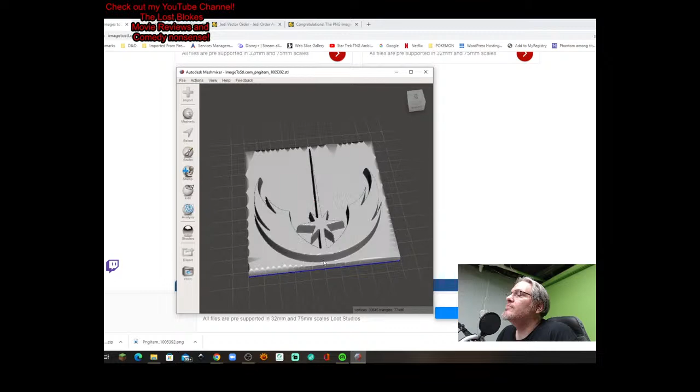Now, I had mentioned that has kind of a weird drop off there and some weird things going on. So I think what I'm going to do is actually reconvert, and I'm going to make it deeper. Alright, we'll go there.

We left the invert input off on that one. I'm not going to compress the result. X-axis or Z-axis mirror, what that actually does is something kind of interesting. It takes the plane, the base, and puts the same exact image on the back. So it would have this back here as well, which isn't going to help me any, but just so you know what it does.

Alright, we'll change it, we'll go with a depth of 12 and a base of 6. Now there's a reason 12 would be too high, and I think that it would cause crushing issues with the stamp itself when we went into the press.

So I'm going to leave that off, or I'll show you what I'm going to do. Okay, so we're going to convert it. Alright, we've got it, we'll download it.

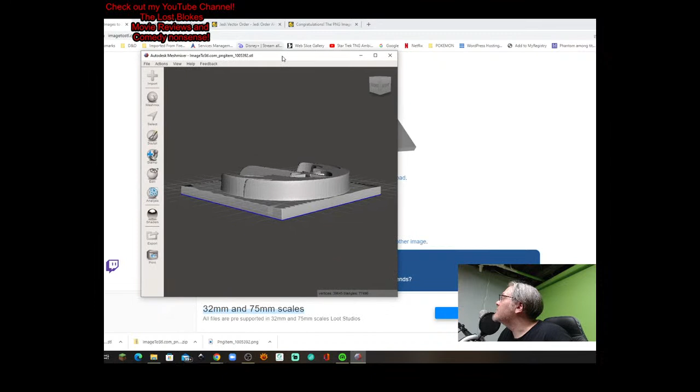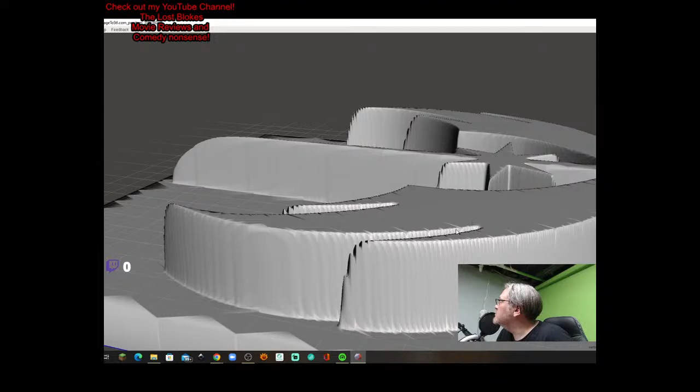Okay, so now we have the same thing, but it is a deeper object. You see how that is, and so we see the tapering, and then we also see this odd stippling here, and we don't want that, because that will cause issues.

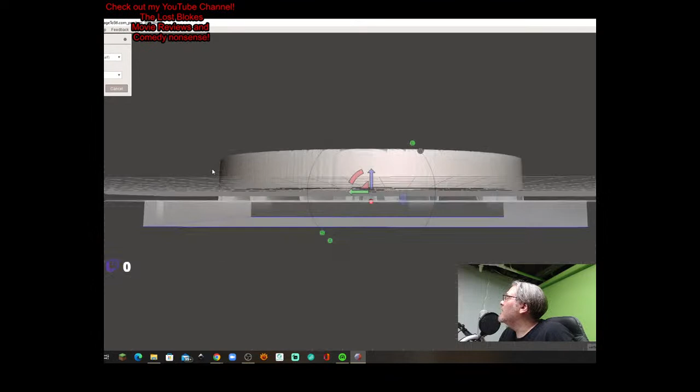So what we're going to do is come up to Edit, go to Plane Cut, and it's going to bring up the plane cutter. Now, real important here, you see, here's the plane that we're cutting. See that? Now it's cutting—if you look at this arrow right here, it's going to cut everything below the plane. So we don't want that, we want to cut above the plane.

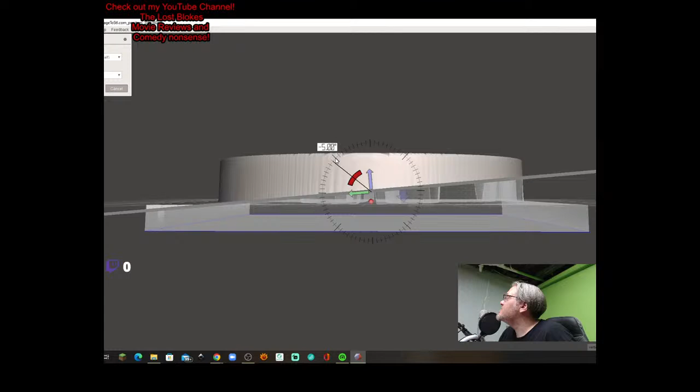So I'm going to grab here onto this red curve, which is going to allow me to change the angle of the plane. We're going to go out to here where you see these tick marks, and drag it along these tick marks until we get to 180. The reason we're dragging on the tick marks is because that makes it exact by 5 degrees. Alright, we're getting some CPU crunchage here. Come on, there, 180, we'll release it there.

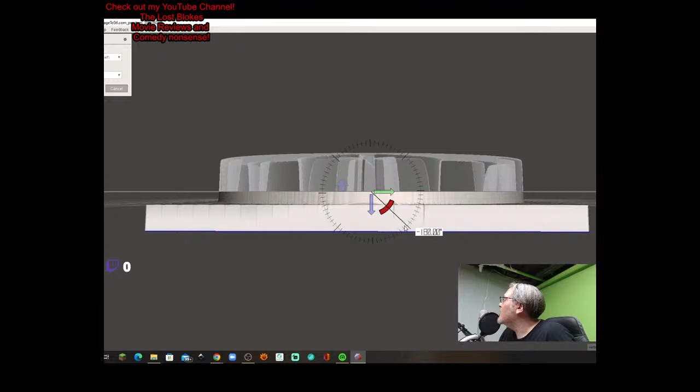Hopefully it's... nope, dang it. Alright, did I just go the wrong... nope, there we go, alright. There we go, we have a plane.

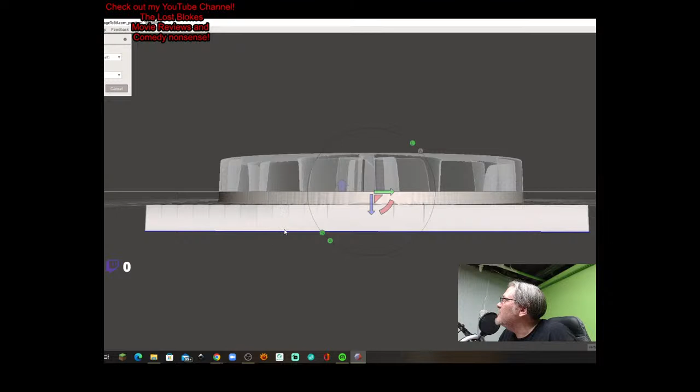Alright, so remember, we want to go 6 millimeters approximately, because I found that's a good height. So here we have 6 millimeters from the top of the plane to the bottom of the base. We're going to grab onto this purplish blue arrow, which is the up-down. So we're not free-forming here, we're just literally moving that plane, and we're going to bring that up to 6.

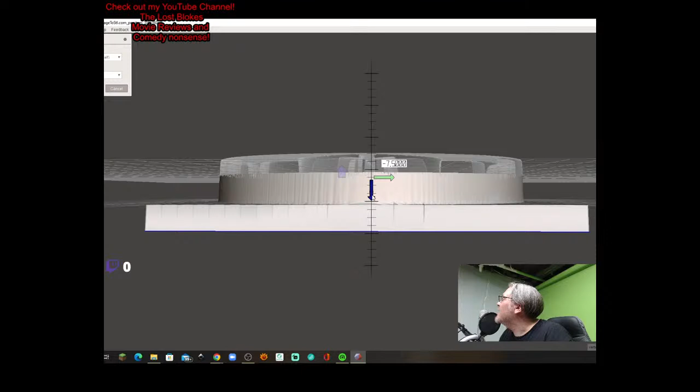Okay, well, you know, if it makes me do 7.5, I'm okay with that. So here, now it shows what we're cutting and what's going to be left. There were some odd striations and things coming from the edges as well, so this will help to take care of that too. So now we are pretty happy with what we've got.

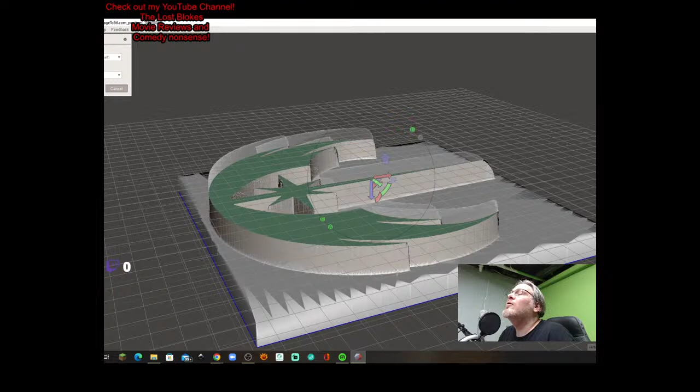We're going to cut up here. Oh, okay, wait, you can't see that, let me pull it down. Now it shows the plane cut settings here. The cut type is going to be cut and discard half, and we already know what we're discarding because that little arrow is pointing above, so we're discarding what's on top.

And then we're going to do a remeshed fill, because we want to remesh what we're cutting, because if this STL is hollow, we're not going to have a surface. So we want to remesh fill, and then we click accept.

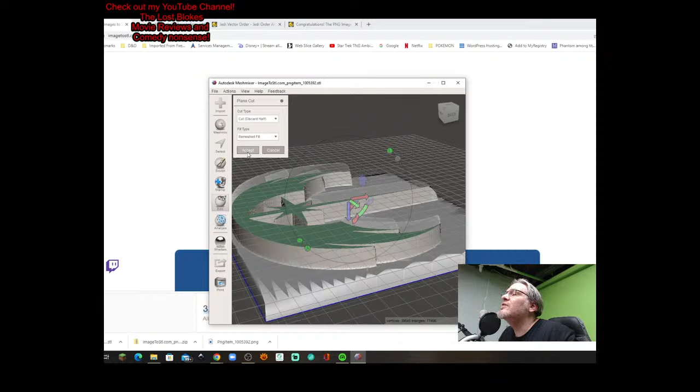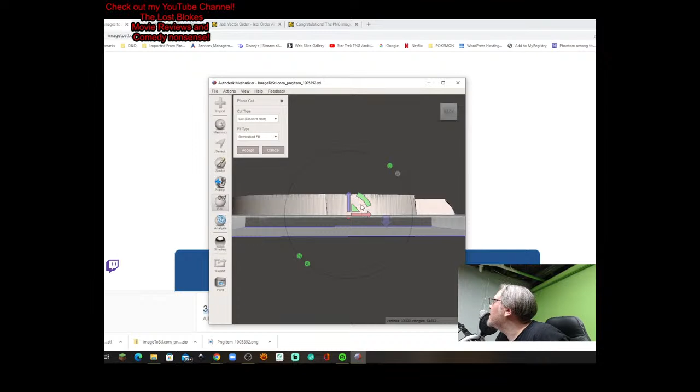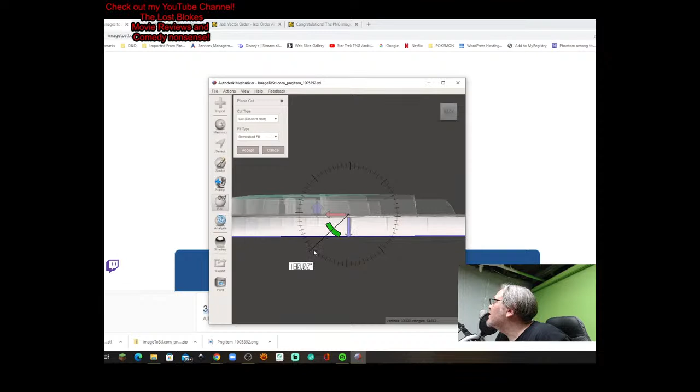All right, we're bringing it over to 65, 70, 75, 80. Come on. There, is that right? Don't you love it? Come on, CPU, you can do this.

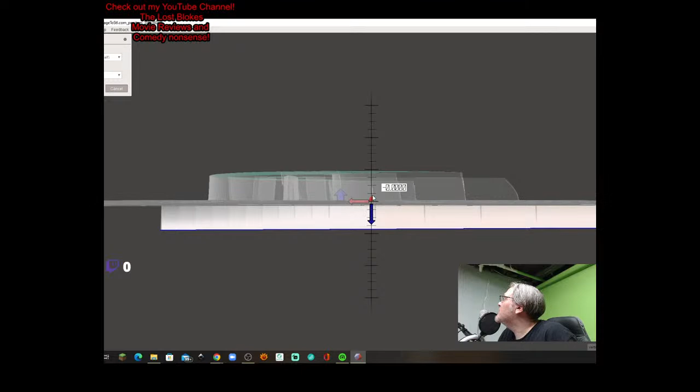Okay. All right, and again we're going to run this up to... all right, that's fine right there. Okay, again, that's what we're cutting off.

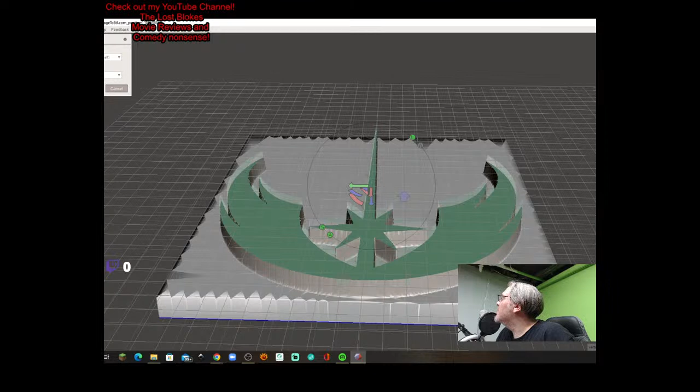We're going to cut and discard half, and accept. There we go. All right, so now we have a very clean surface. You see that? You don't have the striations running in from the edges, and there's only very minor steepling on those edges there. So this is going to be a really clean press.

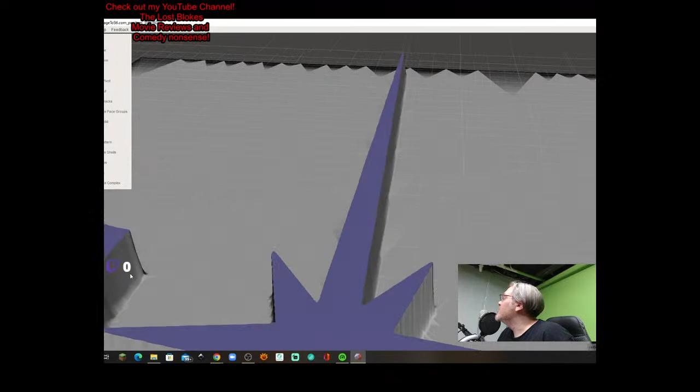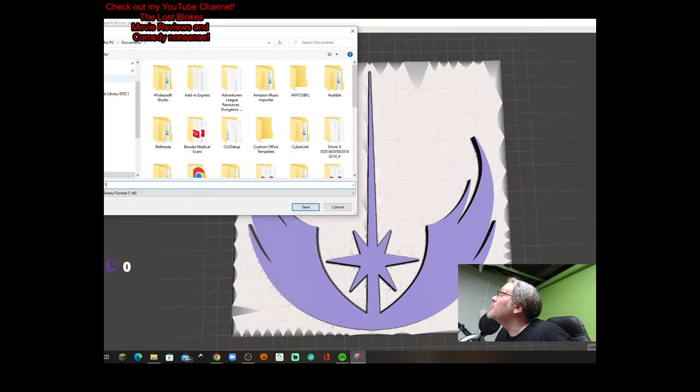Just like that. Okay, now we can save—or I'm sorry, no, with Meshmixer we want to export. So we're going to export it. Still going to be in STL. Now, why is that saying ASCII format? We're going to go to binary, and then we're going to type in Jedi 1, and we'll save that in 3D objects.

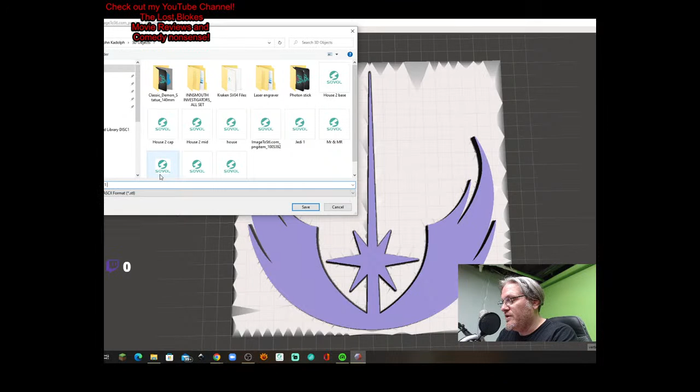All right, now I'm going to save it in ASCII as well. So we're going to export one more time, just in case. Jedi 1 ASCII. All right.

And we'll save it like that as well. Okay, all of this extra stuff around this base isn't going to matter, it's not going to affect whatsoever. So we're going to export it again, so we'll have two different files to look at. And we're going to use...

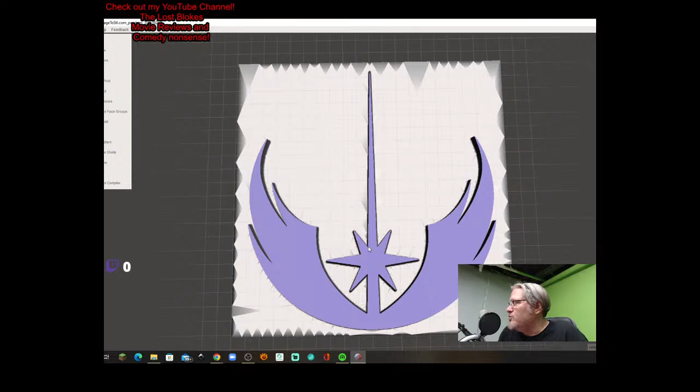CHITUBOX for our slicer. I have an Anycubic Photon Mono. I bought it when it was the 2K version, which is fine. I mean, it does just fine. Hopefully upgrading in a year or so to one of the Anycubic Photon M3s or the M3 Plus. If I can do the M Plus, I'm going to do the M Plus because then I can make much bigger prints. And then there's one step above that even that actually has an autofill for the resin, which is spectacular.

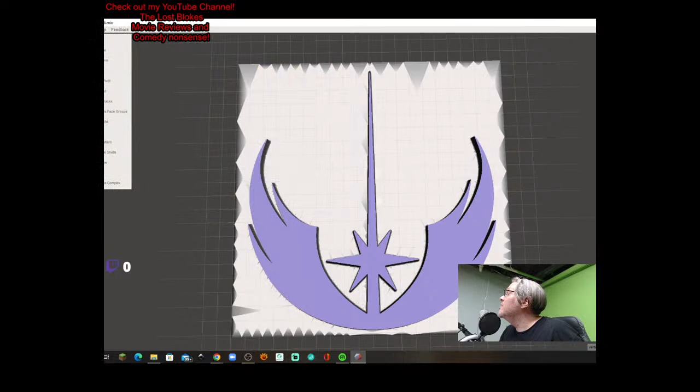But okay, we're done converting. So we're going to just close out Meshmixer here. You know what, I'm going to save the project as well. Okay, so now we're closed out there. And let me bring up CHITUBOX, and I'll bring that over.

Okay, here we have CHITUBOX, best slicer in my opinion for STLs, for resin. All right, what do we got? What do we got? Where is it? 3D objects. Here, Jedi 1. There it is.

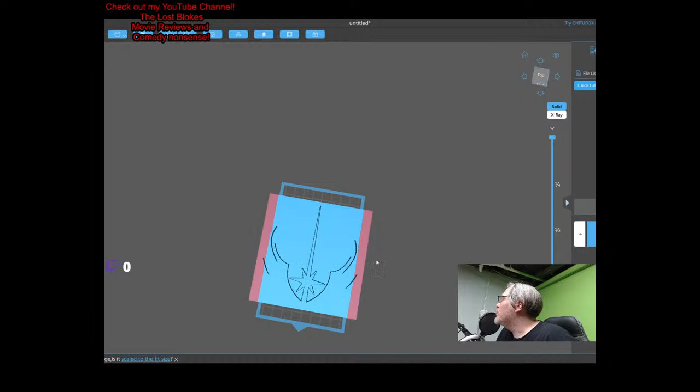Now, obviously it's too big for my build plate. No problem, but let's take a little look, because remember, I was worried about the steepling and all that. There's a little bit, but not enough where it's going to cause a problem.

Now, I'm not going to hollow this out because I want this to be as solid and as strong as possible. Instead, we're going to just go to scale to fit, and then we're going to bring it up just a little bit so that it fills the build plate.

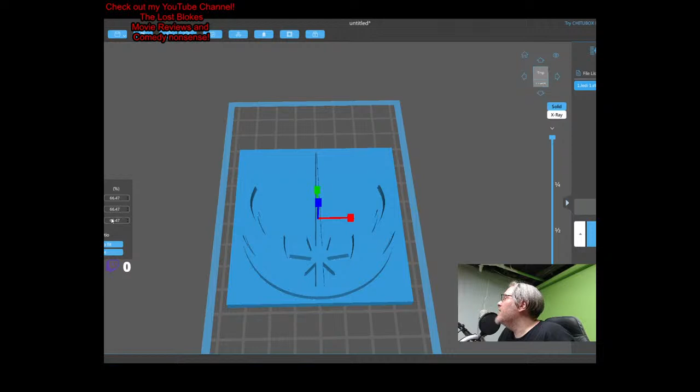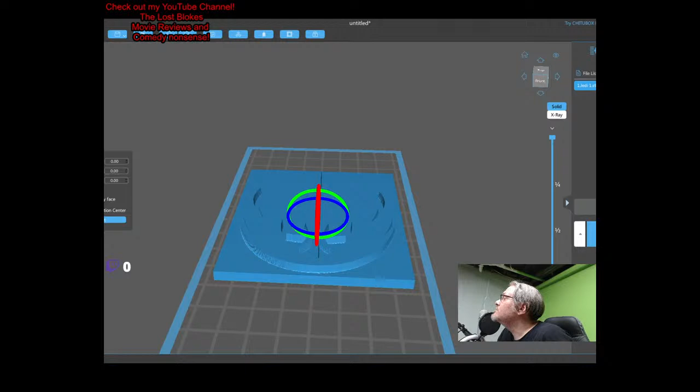Now, alternatively, if I really wanted to make this bigger, I could flip this on its side. And I'll show you what that would look like, and that works just fine. Let's rotate it here. Oops, wrong way. So I could bring it up on its side like this, and I could turn it. Oops, like that. And then I could scale it up by quite a lot, actually.

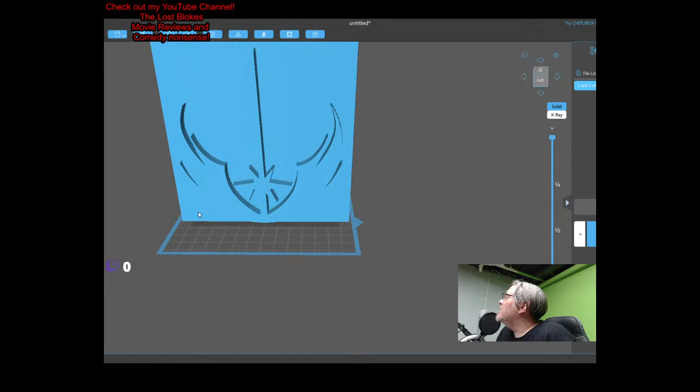Now, this one is fairly good in that we probably could almost print it as is, but there's going to have to be some supports in here the way that it's currently sitting, at least for these two. So if we were to do supports, let me show you what that would look like. It's going to give us a raft down there.

And then let's go to all. Here's what it's going to give us for support. And this isn't bad, it's just a matter of kind of a pain in the ass. And this would probably print just fine.

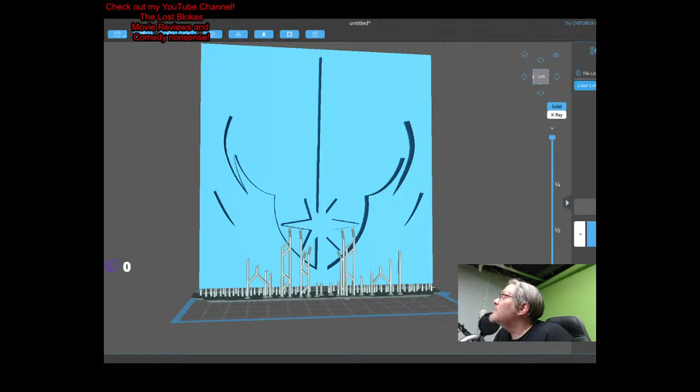But let's take a look at how long it would take to print this. All right, let's just—I don't know, what's my height? I don't want the height to be over 90 millimeters. So let's see, okay, 121 millimeters. So let's make this 90.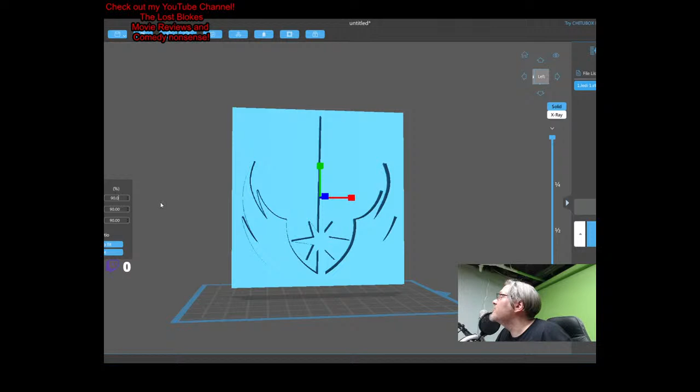Yes, we can remove the supports. Remove the supports. All right, that's 9. We don't want that, we want 90 millimeters. Okay. Oh shit, I changed it to percent. That's okay, well, it's roughly 90 anyways, so that's fine.

Let's go back—pardon my language there. In our normal streams it doesn't matter, this one it probably does a little bit. Okay, so let me re-add the supports here.

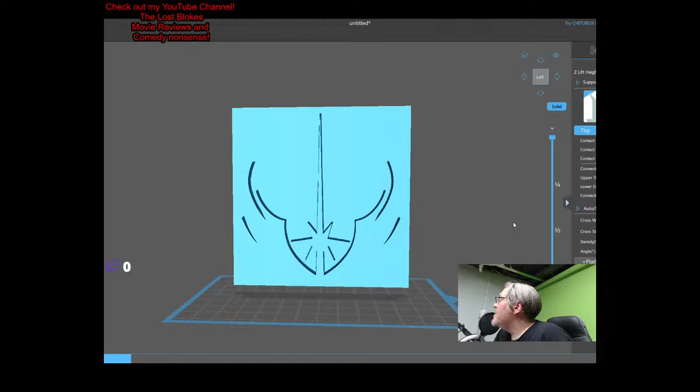Okay, hopefully everybody can still see what I'm doing. Oh, nope, you can't, can you? Doggone it. Okay, there we go. Is it really not coming up, or what's going on?

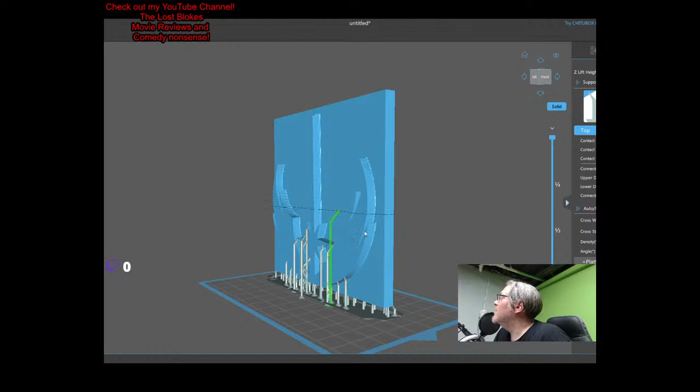Okay, so you can see that it generates those supports. I have them set to medium because something like this runs the risk of pulling right off.

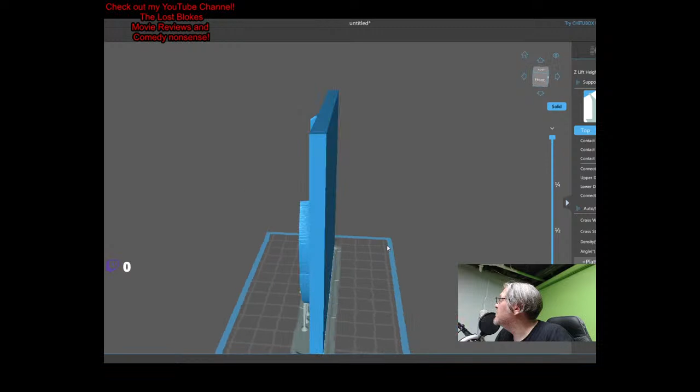But now that we have our supports on, let's slice it and see how long this will estimate to take. Yeah, 5 hours, 48 minutes. Notice that, you can't see it, but it's up here. 5 hours and 48 minutes it would take to print this, and we don't necessarily want to take that long.

But the cool thing is it shows you your volume as well, how much it's going to take to print it. And this is with 100% fill rate, at 6-second exposure time and a lift, so it's the normal stuff.

I don't want to make it full screen, but okay, so that's what we'd be looking at standing up. I'm gonna save it just for giggles.

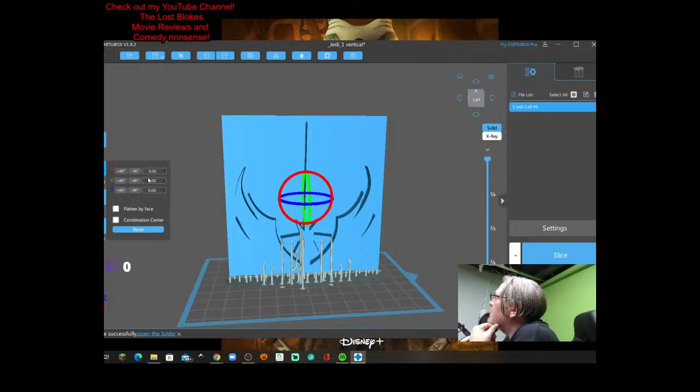Okay, it's done, so we're going to go back. We're going to rotate it back down flat. And okay, we're gonna flatten by face, pop. There we go, now it should be right on the build plate.

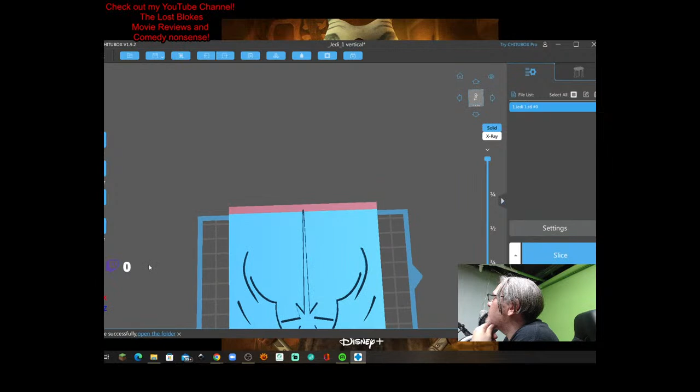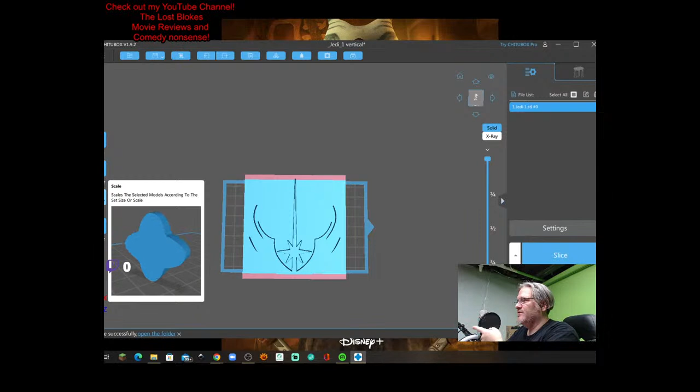Yes, now technically we can build it straight to the build plate. Something this big always runs the risk of not adhering or not staying on the build plate. I don't like using a raft and supports for something like this because it's going to be flat, and the raft is going to be the same size as the piece anyway.

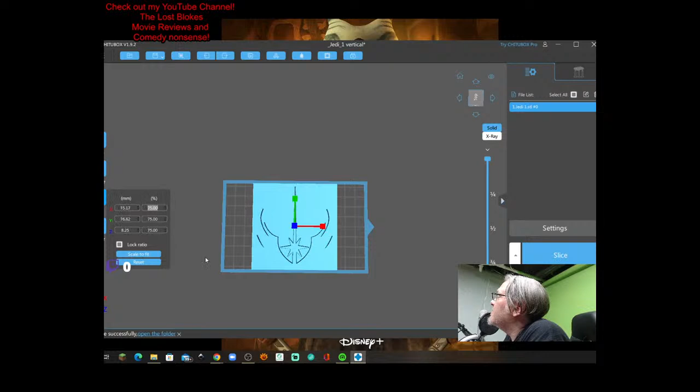So we're just going to scale it down to fit. Now we can't get 90 millimeters, so we're going to sacrifice a little bit there, 75 millimeters, which is going to come out on that leather round kind of small. So doing it the other way is optimal.

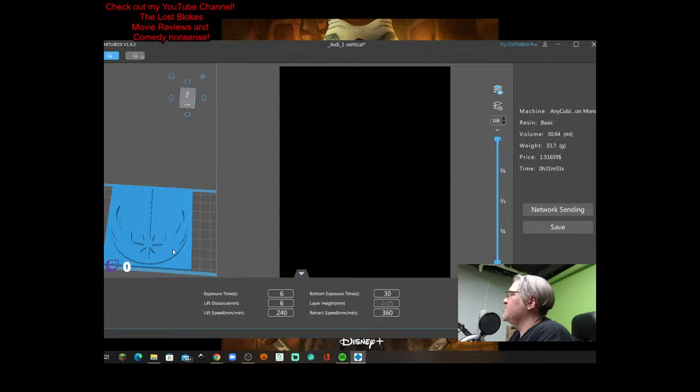But let me show you here again, let's slice it. Look at that, 31 minutes and 51 seconds is the estimated print time, and the volume is so much lower as well. So it's going to use less because it's smaller, but the print time isn't because it's smaller, it's because it is shorter. So it can be the whole size of the build plate and take the same amount of time.

That's why when you do builds with these kind of printers, if you're doing miniatures for example, you want to put as many miniatures on there as you can comfortably put. So 4 to 6, because it's going to take the exact amount of time to print 6 miniatures as it is to print 1 miniature.

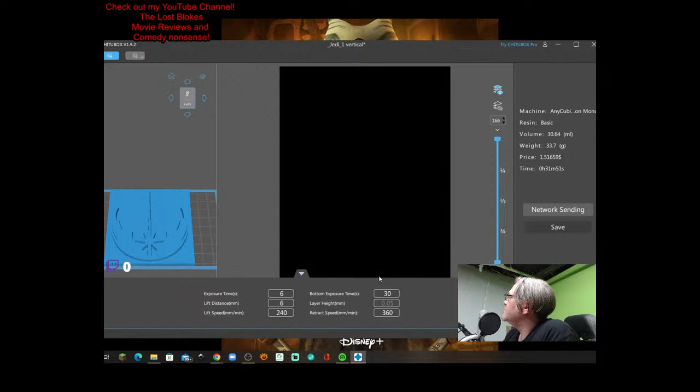All right, so we have that, now I'm going to save it again. Jedi 1. Horizontal. There we go.

And then I'm going to save it to a flash drive, take it over to the 3D printer, and in about 45 minutes or whatever, we'll have something very similar to this, but with the Jedi symbol. And that one should press in pretty well.

I can get a lot more detailed on that, and what I mean by that is the actual unit can have a lot more detail like you see on here. And believe me, all of these runes come out absolutely perfectly in the leather.

All right, so I'll conclude it there. This was just a real quick workup on another leather press that I wanted to make for an upcoming project, and wanted to share that with y'all.